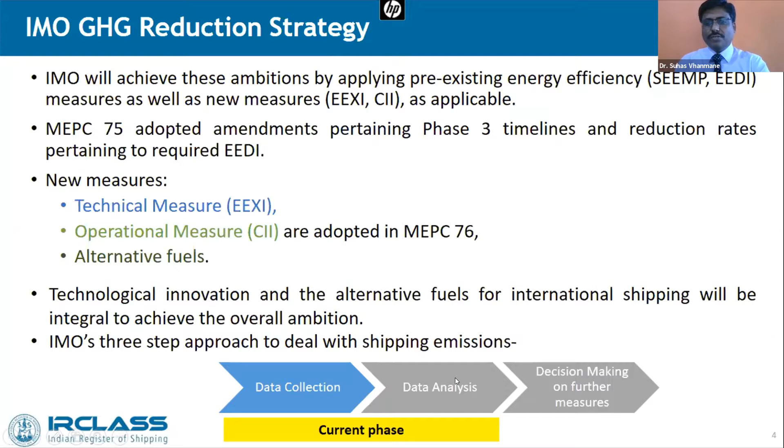We know this three-step approach taken by IMO: it started with the data collection system, DCS, in 2019. Data analysis is also being done with the data, and further decision making will follow the collection and data analysis phase. Decision making will be undertaken by the end of 2026.

Moving forward, I will touch upon the EEXI requirement. This is a technical measure of ship's energy efficiency, and regulations 23 and 25 of MARPOL Annex VI are applicable from 1st January 2023 for ships of 400 GT and above engaged in international voyage. For each ship, it has to attain EEXI, and required EEXI values are to be calculated and compared - it is required that attained EEXI should be less than or equal to required EEXI. If it meets, well and good.

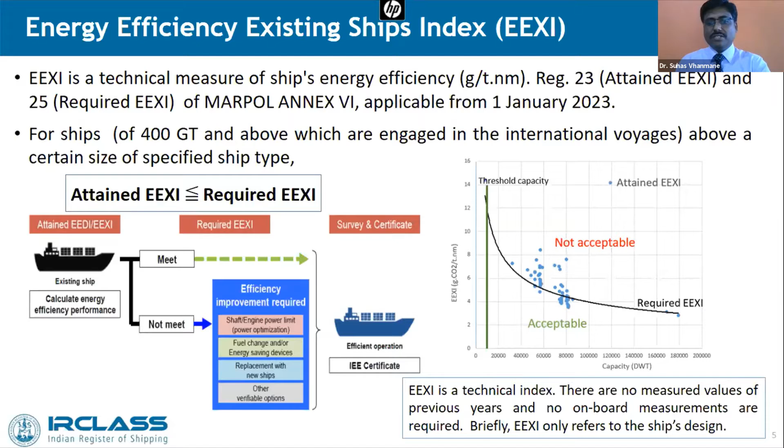But if it doesn't meet, the ship has to undertake some energy efficiency measurements. This is a technical index, and there are no measured values from previous years and no onboard measurements required. So briefly, EEXI only refers to the ship's design.

But unlike EEXI, CII is an operational measure of ship's energy efficiency, and regulations 26.3.1 and 28 of MARPOL Annex VI are applicable from 1st January 2023 for ships of 5000 GT and above. This is basically an extension of the existing requirement of the IMO data collection system, wherein the data verified under IMO DCS will be used to calculate attained annual operational CII, which should be less than or equal to required annual operational CII.

This required annual operational CII is calculated based on the base year of 2019 data collected. The main thing to note is that the required annual operational CI will be reduced every year after 2023 by 2%, with a new required CII value for each ship going forward. At the end of 2026, this analysis will be considered again for further decision making.

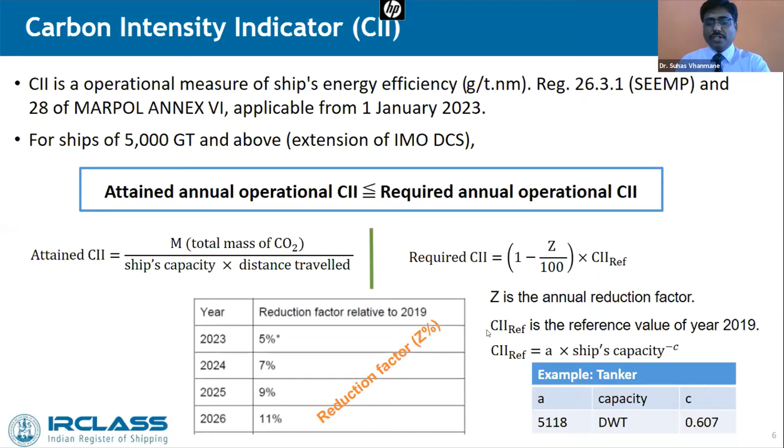I will continue with CII and now talk on the CII rating. So once we have the value of attained annual CII, the vessel will be assigned a rating label among the 5 grades A, B, C, D, E. Respectively, they will be major superior, minor superior, moderate, minor inferior, and inferior. So it is expected that the vessel should be rated as A, B or C.

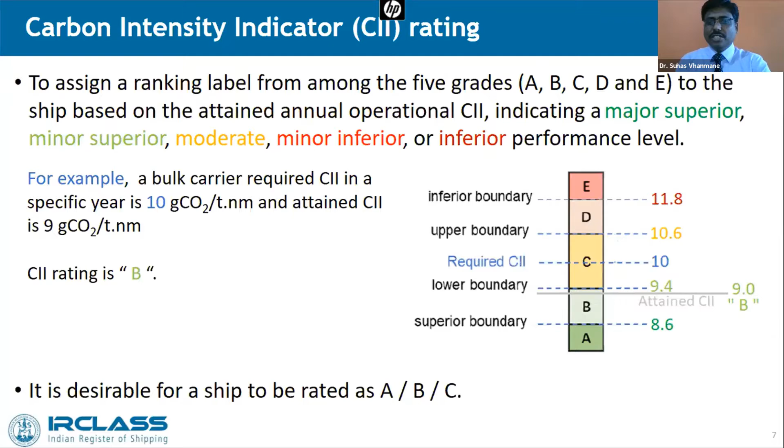The midpoint of C is basically the required CII value. So if the vessel's attained CII value is 9, then it will be assigned rating B. So it is not good for any vessel to be rated as D and E. So what is actually important here is that the vessel needs to monitor its fuel consumption data very closely, very accurately, so that they will not overshoot in the rating scale.

After the CII, there are going to be amendments in the SEEMP, and SEEMP Part 3 is now going to come, which includes mandatory content such as methodology for data collection and calculation of attained CII, a 3-year implementation plan on how the required CII will be achieved, effectiveness of measures implemented, followed with self-evaluation and assessment, and this is subject to approval.

So we can understand here that the data required for calculation of attained annual CII is to be monitored as accurately as possible so that there will be a minimum value of attained CII. This SEEMP Part 3 mandatory requirement is applicable for all ships irrespective of their rating. But for ships that achieve a D rating for 3 consecutive years or an E rating for 1 year, a corrective action plan shall be developed as a part of the SEEMP Part 3 and is subject to approval.

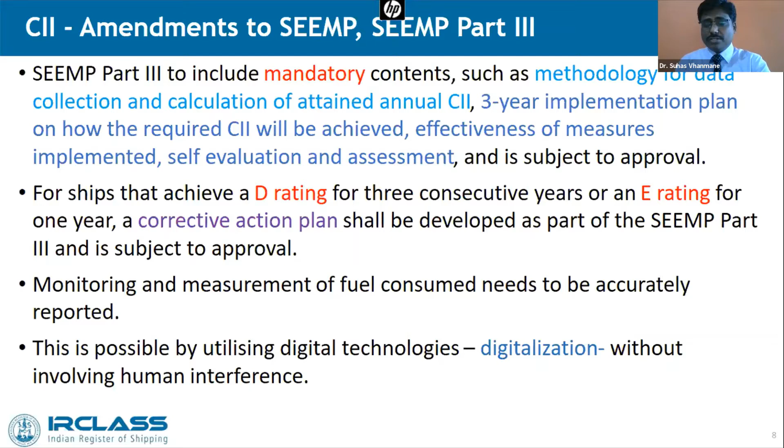So this entire thing, what is going to be coming as a requirement under SEEMP Part 3 and CII rating, is possible by utilizing digital technologies, that is digitalization, without involving human interference, because we need these values of fuel consumption as accurate as possible. So I am just stressing here that digitalization is going to help us in achieving the compliances.

I will start with a brief on the digitalization definitions. It always starts with the collection of data in a digitized way, and use of advanced digital technologies to increase efficiency of existing activities or to enable new activities including decision making. In short, a ship generates more than 2 GB of data on a daily basis when at sea, and this data should be used for making decisions.

So in the context of decarbonization, we require monitoring of data, measurement of data, and that can be possible by connecting sensors which collect the data, connect to the cloud and supply this data for further analytics, where machine learning techniques can be used to identify patterns in the data and develop models for prediction and creating alerts or alarms going forward.

Digitalization and decarbonization are mega trends that will enable the shipping industry to undergo structural operational changes and are seen as a driver of sustainability. One thing I want to again tell here is that digital has the potential to provide IMO with the data and information to develop global standards, new regulatory approaches, implement them and evaluate the same.

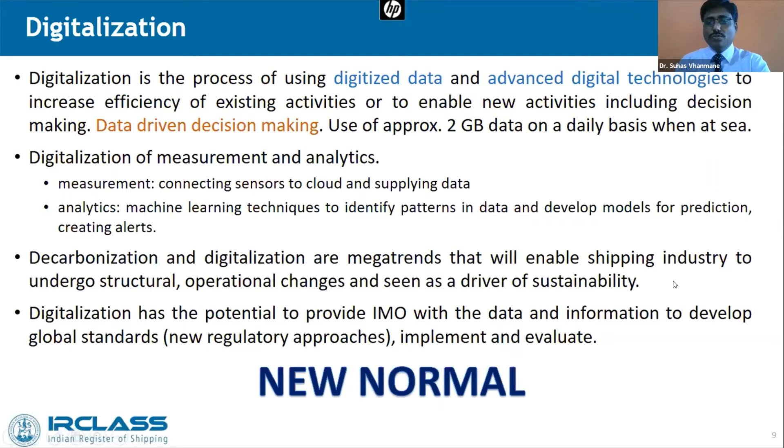So here, I started my discussion with the IMO strategy ambition levels, then the requirements of CII and what needs to be done to comply with the CII requirements. And then we came to digitalization. Now IRS is providing this facility, this digital platform for use by the ship owners, helping them to meet the environmental compliances towards decarbonizing the shipping industry.

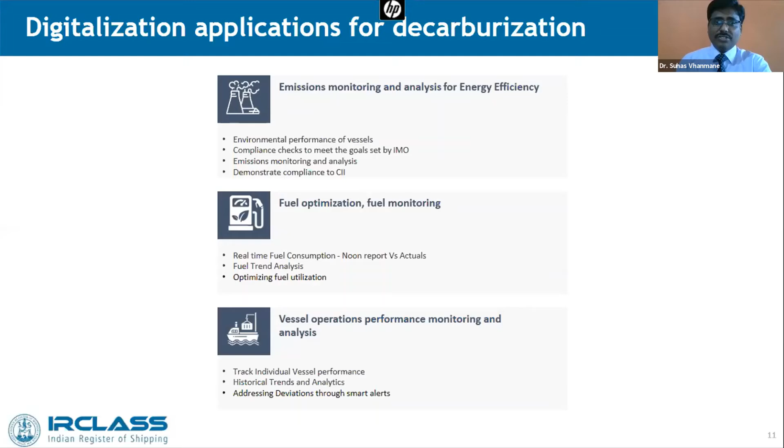Ultimately, what we are going to do here is monitoring the overall vessel performance and analysis by considering the past historical data and trends and applying data analytics techniques such as machine learning and artificial intelligence to this data.

Now the next dashboard picture is the voyage to voyage fuel consumption monitoring and CO2 monitoring. We have the inputs on the departure port data, arrival port, and how much cargo is taken at sea, and we come to some graphical representation in terms of bar graphs for the fuel consumption, and the same is plotted in different units like per nautical mile, that's transport work, then CO2 over here, and the time spent at sea and time spent at berth. So this is the fuel and emission monitoring per voyage basis.

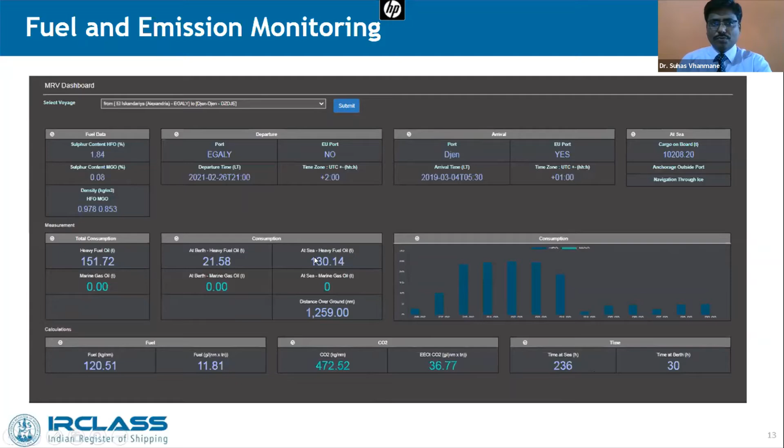We can compare both noon and actual fuel consumption values for any vessel. If you see over here, the red line is basically the actual fuel consumption experienced by the vessel, determined by our analytics tools, and the slightly bluish bars are the fuel consumption reported as per the noon reports, and the yellow boxes are the differences between the actual fuel consumption and the noon reported values. This is possible to do on a daily basis for any ship.

So this is how, sitting at the shore office, we can understand whether the values of fuel consumption reported in the noon report are really correct or there is any deviation, and further decisions can be made.

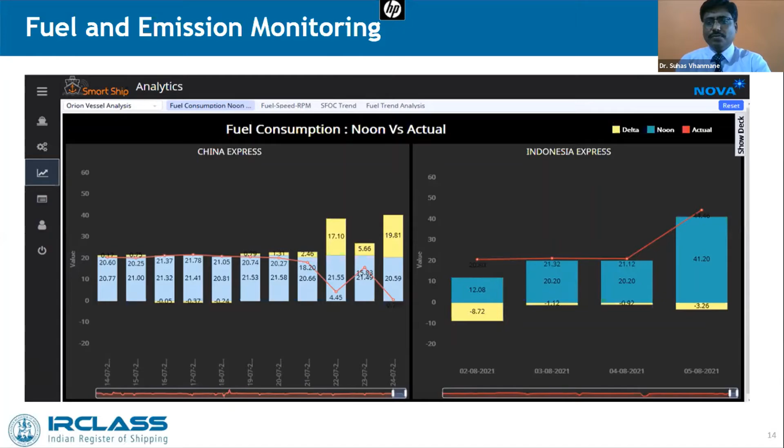Trend analysis: based on the past historical data of the vessel for any given period, we can define the graphs for fuel consumption with respect to the shaft RPM and with respect to vessel speed for any given shaft RPM or speed range. Here, on the right hand side graph, the upper limit set for this vessel is 800 kg per hour fuel consumption. That is the set upper limit, and we have the actual trend line of the fuel consumption for different ship speeds.

This upper threshold is used in the creation of alarms and alerts if the vessel is approaching this upper limit. This is how the vessel can contain or limit its fuel consumption during its voyage, so that the overall fuel consumption will be lesser and CO2 emitted will be lesser, and that's how it can meet the set CII value.

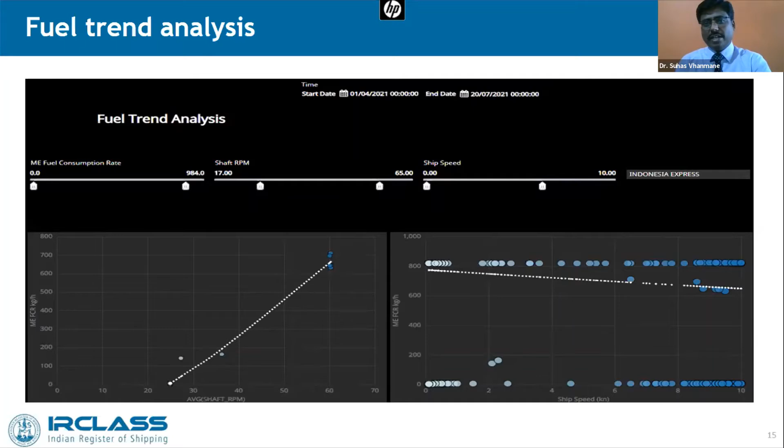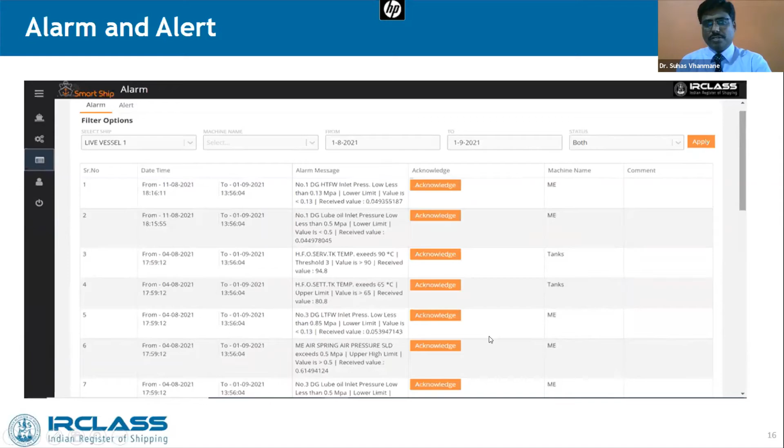This dashboard picture shows the list of alarms and alerts. Based on the time and date, there will be some alarm message. This is a pre-filled message, and which part of the system this alarm is related to is also shown. If we see one of the alerts, it will have a description of the alert, the possible advisory that can be given on board, the causes of this alert, and the action to be taken. These are the suggested actions. It also shows which threshold this alarm is created against. These thresholds are preset for each parameter.

This entire dashboard shows the fleet performance. The red dots are basically the fleet of any company. So sitting at the shore office, it's possible to monitor where the vessel is and what its parameters are. Down below you can see each box is per ship, and if you click that one, you will get to know the details of that particular vessel, its location and further information on its fuel consumption.

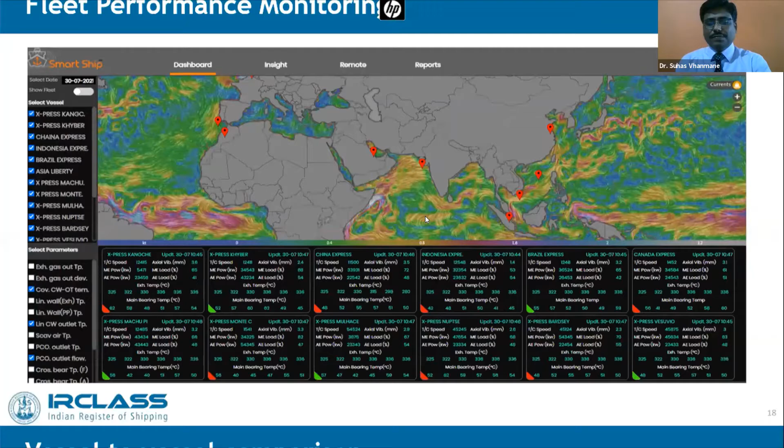Right. So up to this point, I have discussed the digitalization applications. There is more we can talk about, but given the limitation of time, I am not going into more detail on each of these slides, but definitely we can discuss those on a one-to-one basis.

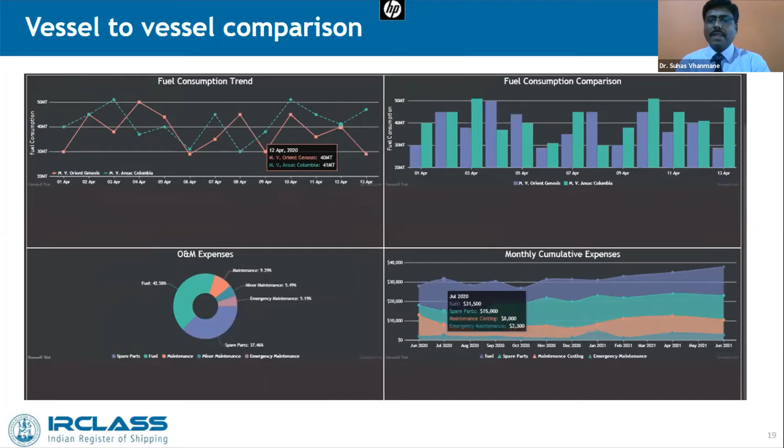Henceforth, I will move to the alternative fuels. One thing here is that the IMO GHG targets may not be met without alternative fuels, as I said earlier, and energy sources that offer deep GHG emission savings compared to current fossil fuels. Each of these alternative fuels offers different possible CO2 emission reductions. However, studies reveal that no alternative fuel currently exists that can cater to both problems: reduction in environmental impact as well as compliance with current environmental regulation. No one solution is available.

For example, if you take LNG, it is a great option to comply with existing regulations, but it emits greenhouse gas in the form of methane slip. Also, the tank sizes are almost 3 to 4 times larger, and thus it increases the cost of a new vessel by up to 30%.

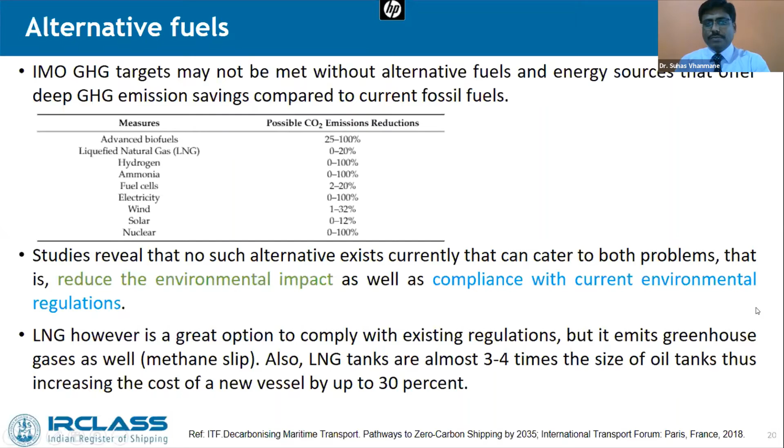So in a nutshell, going forward, for the selection of alternative fuels we need to consider some key aspects: production processes, sources, and technology; well-to-wake emissions, the total impact from production to end use; energy density, how much energy a fuel contains for a given volume or weight; drop-in fuels, which can be directly used in existing engines; technology readiness, that is technology advancement and maturity for uptake in the marine industry.

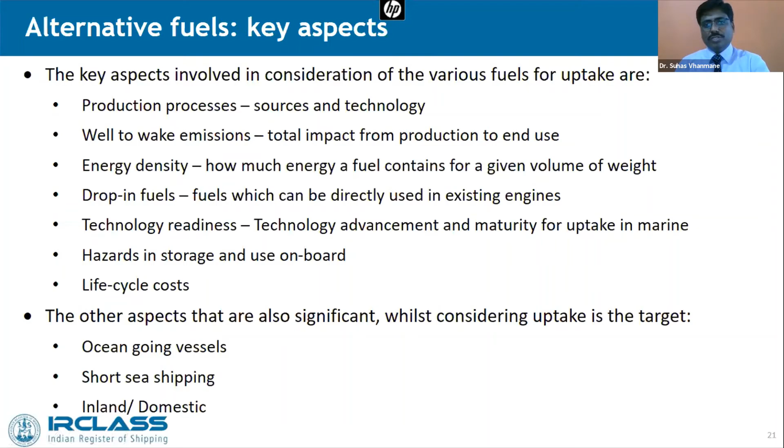Hazards, the risk in storage and use on board needs to be assessed, and at the end, life cycle costs. So these are some of the key aspects which we have understood while working on alternative fuels. At the same time, there is another aspect, the target where these alternative fuels are going to be used, whether on ocean-going vessels, short sea ships, or inland or domestic markets. So these are the key aspects when we select alternative fuels.

IRS already started two years back by developing its rules and guidelines to support industry implementation. So far we have developed rules for gas fuelled seagoing vessels, classification notes on natural gas fuelled vessels for coastal and inland waterways, guidelines on methanol fuelled vessels, guidelines on vessels with fuel cell power installations, and guidelines on high voltage shore connection systems for ships. These are for shore supply connections that reduce vessel emissions at port. And we have guidelines on battery powered vessels also. So this is for preparation, and more are coming in the future.

We are involved with industry in some collaborative projects on alternative fuels. Our first project is the biofuel trials on coastal vessels, where the aim is to reduce GHG emissions of coastal vessels by the use of biofuel blends. IRS has been involved in witnessing and verification of initial trials, measurements of emissions, as well as full examination of engines after a trial period of 3 months under all sea conditions in both loaded and ballast passages.

Here, FAME, fatty acid methyl ester, is used as a fuel, which is biodiesel obtained from filtered soya extract. This is blended with low sulfur high speed diesel, LSHSD. So there is a 20% blend of biodiesel with 80% LSHSD, and we call it a B20 blend. The pure biodiesel B100 samples are tested to meet the criteria per the ASTM D6751 standard.

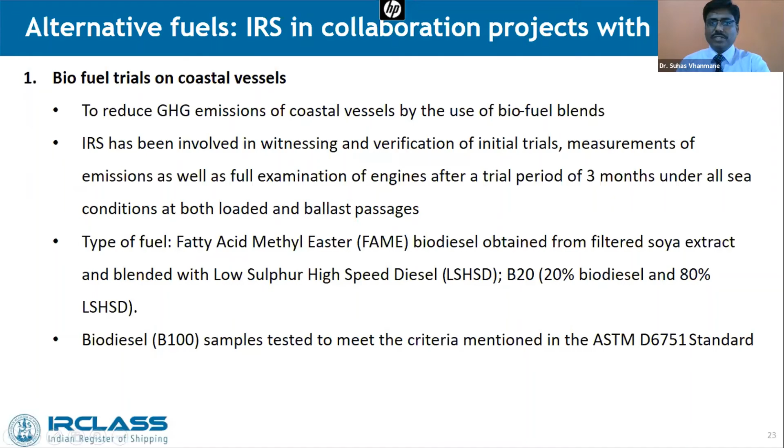So there are 2 vessels over here in this project, and these are the main engine and auxiliary engine parameters. Ship 2 was basically built before 1993, wherein the requirements of SOx are not applicable, but for ship 1, SOx requirements were applicable. So our observation here is that CO2 emissions are found reduced by approximately 7% on average while running on blend fuel oil.

And vessels using a blend of VLSFO, residual marine fuel, with biofuel on their international going ships. This is another project which we are going to start now. Overall, here the challenges are in terms of sustainability, availability, and commercial viability. It depends on vessel to vessel from where the fuel is made available, and if there are any changes to the engine to be made, the OEM's consent and confirmation.

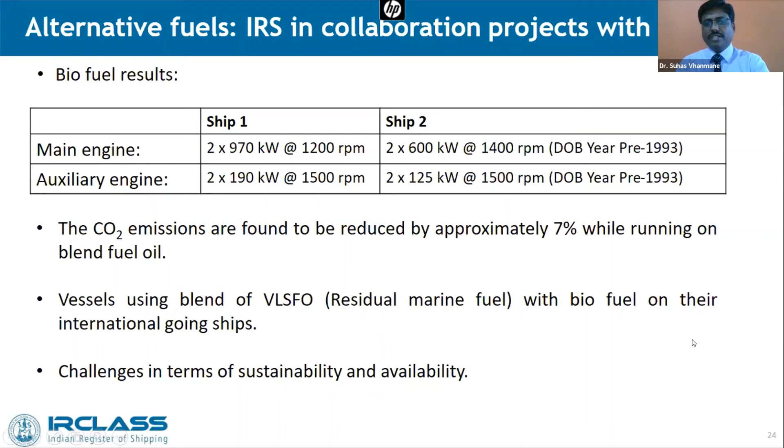Our second project is on retrofit and conversion to LNG and CNG fuels. Here, retrofit of engines is undertaken to be operated on dual fuel for inland water and coastal vessels, wherein LNG and CNG are used as a fuel. We are working on a 55-meter Ro-Ro ferry conversion to LNG fuel, and this retrofitting is underway as per the requirements of IRS classification notes for natural gas fuel vessels for inland and coastal service.

So far, things are fine in this project. We are on a positive note, but right now we cannot disclose more than this. At the same time, we have another project, retrofit or conversion to CNG fuel as a dual fuel option for inland water barges. There is a huge demand for these kinds of vessels, barges and coastal vessels.

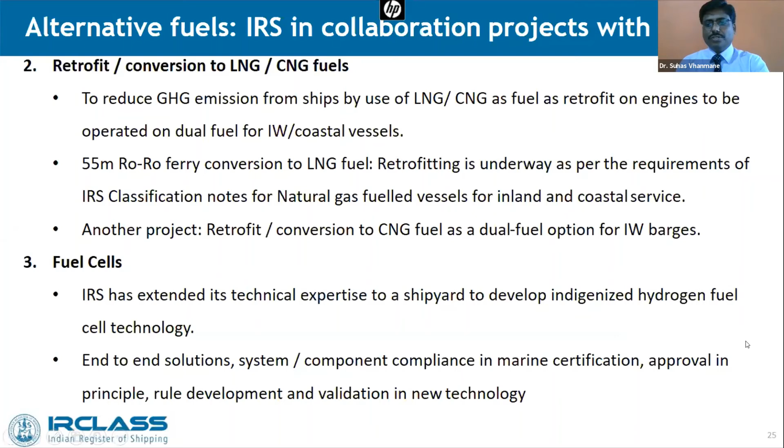The third project is on fuel cells. IRS has extended its technical expertise to a yard to develop indigenized hydrogen fuel cell technology, wherein end-to-end solutions, system or component compliance in marine certification, approval in principle, rule development and validation in technology are the areas wherein IRS is supporting this shipyard towards the new development on fuel cells.

We are working on battery propulsion, basically the certification of lithium-ion batteries for marine industry use. So far, the works visit is completed, and some of the type tests of the batteries are ongoing, and soon they will be completed also. We are also working on certification of vessels with hybrid propulsion and solar-powered vessels with lithium-ion battery storage. So this is so far what we are doing on alternative fuels.

But even if we are selecting any alternative fuel as a fuel for the vessel's voyages, at the end we need to take a decision whether this is viable or not, whether the alternative fuel adopted is effective or not. And then again things come to digitalization, wherein we require data from the ships' daily operations, how much fuel it has consumed, even if it uses alternative fuels, and further decisions are to be made on the effectiveness of alternative fuels after doing the analytics on the data.

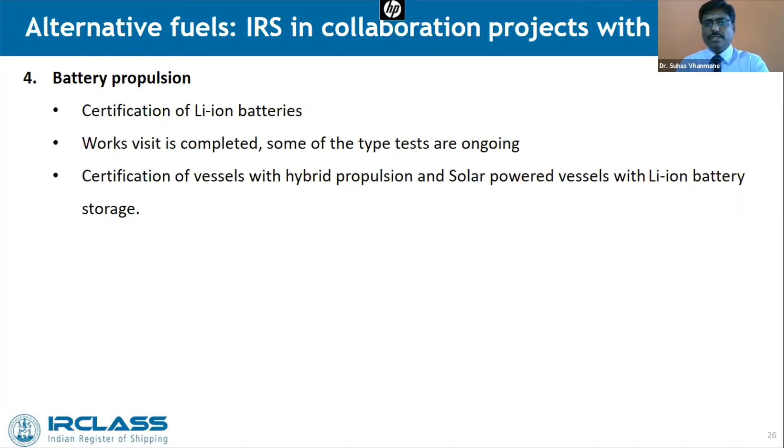So in brief, CII is to be more focused on than EEXI, since EEXI is a design concept and maybe a one-time process. The new normal of digitalization needs to be adopted with the changing landscape, digital connectivity, data and analytics skills. Every shipping company may not adopt this digitalization landscape on its own, because it requires some setup, some infrastructure, some skills, and every company may not be adequately positioned to utilize this digitalization technology.

So in this case, there has to be a collaborative approach, just like I introduced you to the IR Class and SSH digital platform. This can be utilized for a collaborative approach, and that's the best practice I see to grab the opportunity of digitalization, rather than spending, because spending is another aspect of adopting digitalization. Again, I repeat that for evaluating the effectiveness of alternative fuels, digitalization has to be in the picture in a collaborative manner.

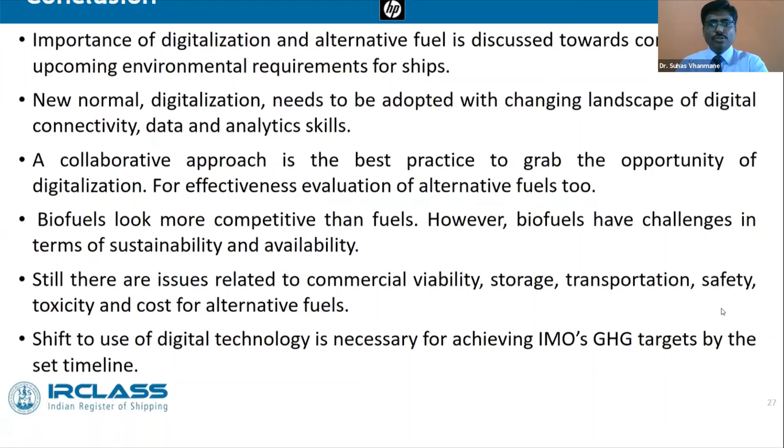In a nutshell, you've captured three of the hottest topics today: greenhouse gas emissions, data monitoring and management, and alternative fuels. There are a few questions that have already come up.